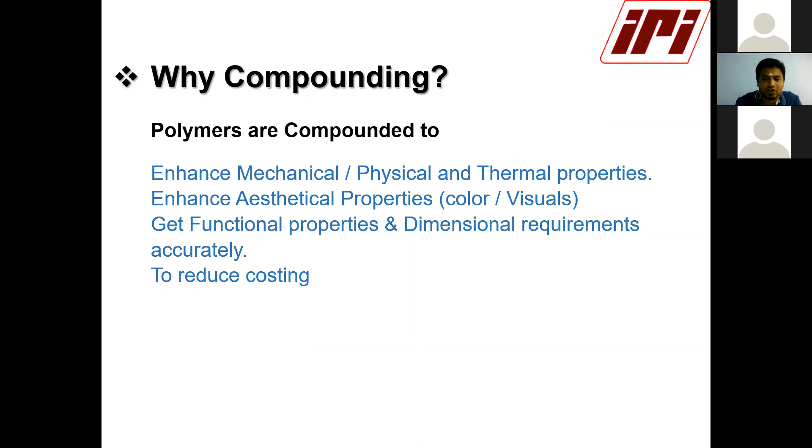Ingredients play a very crucial role to enhance compound properties: polymer alloys and blends, best example PC plus ABS blend alloys, and fillers to increase mechanical strength and stiffness, plasticizers for flexibility improvement, lubricating agents for easy moldability, antioxidants and heat stabilizers for blown film applications, and UV stabilizers and fire retardant additives for flammability and smoke suppression.

Best example is switch boxes and electrical items, conductive fibers for electrical properties, pigments for coloring and better aesthetics. For some parts to look good and shiny, we add pigments, and fillers for economic viability, wherever we can load more fillers to save more money.

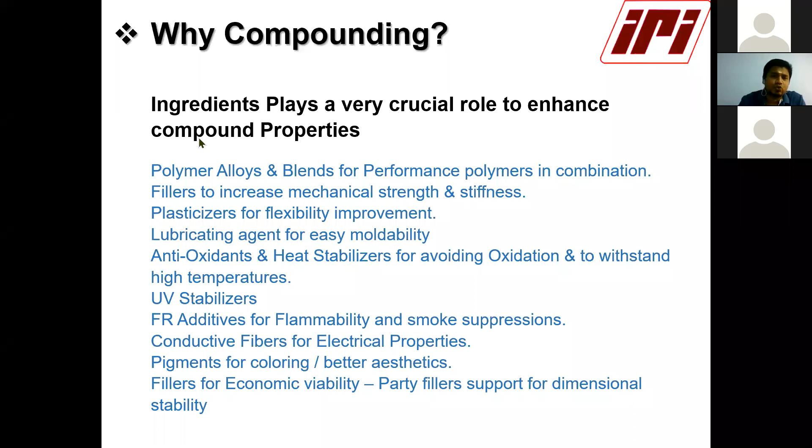And this is the extruder system: there is single screw extruder, twin screw extruder, multiple screw extruder. Today I am going to cover this twin screw extruder, co-rotating twin screw extruder, intermeshing type. This is the co-rotating twin screw extruder.

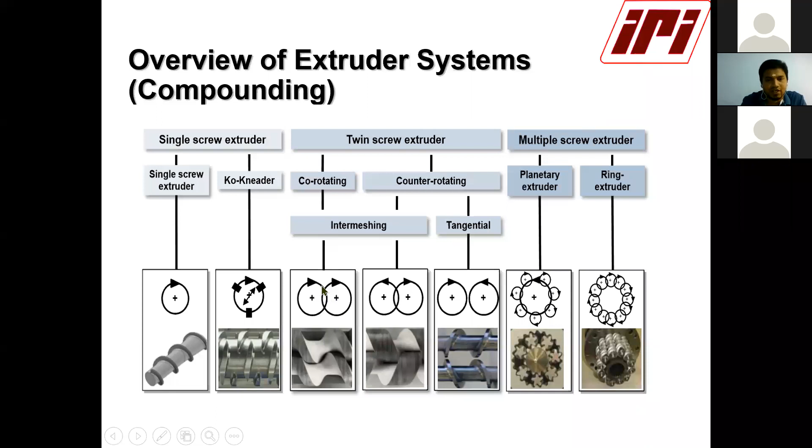Hello. Compounding task, madam.

Whenever we are entering into a compounding line, whether it is a factory, a customer end, maintenance, or a raw material segment, we should know and be ready to handle this compounding task, like alloying polymer alloys such as PC plus ABS or similar.

Then filtering of the polymer melt and degassing unit in the compounding machines, incorporating additives and colors, and major loading of fillers and reinforcement with glass fiber. Major engineering projects would come up with glass fill up to 40%, 50%. So these are the major compounding tasks.

Wherever line we go in compounding, we will face these tasks. And this is the general layout of the process.

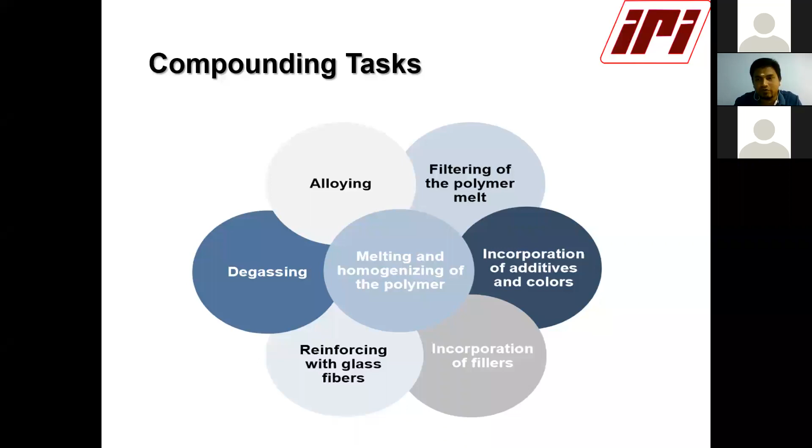This is the twin screw zone, the compounding zone. This is the main hopper, main feeder, where we are adding polymer, additives and fillers, and these are the screw elements.

This is a kneading element. This is the complete processing zone. Here the atmospheric degassing unit comes, and the vacuum degassing comes. Since we are adding ingredients like calcium carbonate powder and liquids, atmospheric degassing and vacuum degassing take place here.

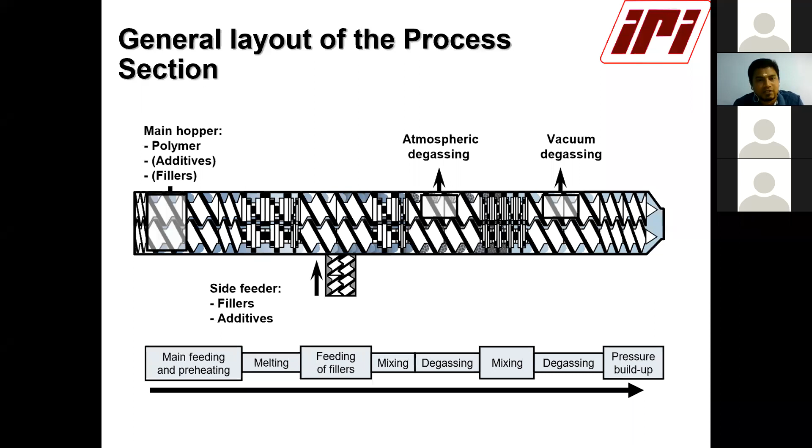And on the side, side feeder, filler additives will come based on the output. The side feeder is used, and then twin screw elements, segmented barrels, and diameter ratio.

The twin screw elements, this co-rotating twin screw, is made up of different kinds of screw elements. This is called screw elements, and this is kneading - these are kneading blocks. This is a conveying screw element, called conveying elements, and each of the screw elements and conveying elements is fitted on this shaft.

I will show in the next slide. And this is a segmented barrel - this is a segmented barrel type.

For twin screw compounding extruders, we should know what is this Do/Di ratio. This Do/Di ratio is the outer diameter of the screw, and this is the shaft inner diameter. So we need to know this.

If you consider machine zones, some companies like Coperion or Steer have a unique Do/Di ratio. For example, some companies work with a Do/Di ratio of 1.50, some work at 1.71, some work at 1.66. Based on this Do/Di ratio, the shaft safety will be higher.

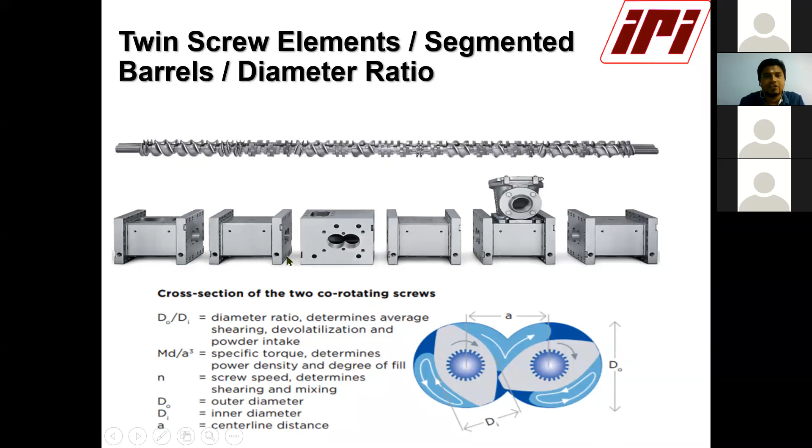And these are a few pictures of screw elements. This is an element, so-called conveying element, and this is a kneading element, which plays a major role in kneading and dispersion in the twin screw extruder. And this is also a conveying and kneading element on the left.

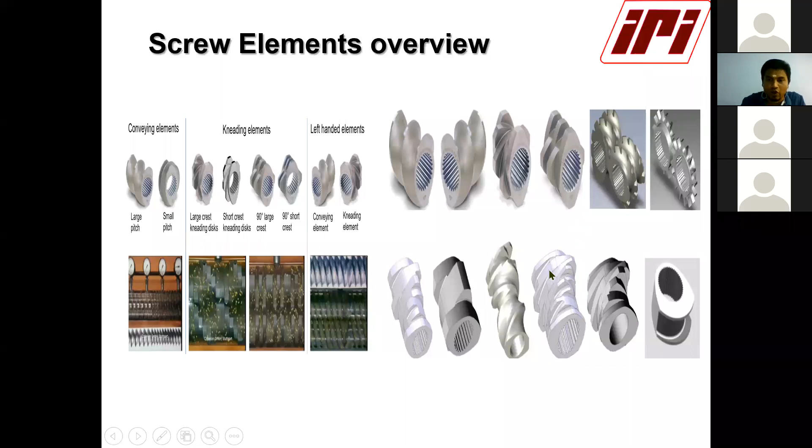These are some few pictures of screw elements and kneading elements. This is a kneading element in detail. These kneading elements ensure good dispersion and energy input, melting and good dispersion ratio of the end product, so that the MFI and melt quality will be good once we make the compound.

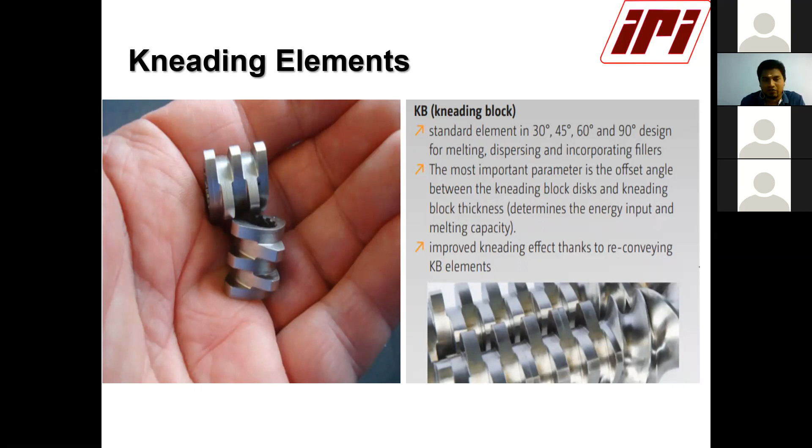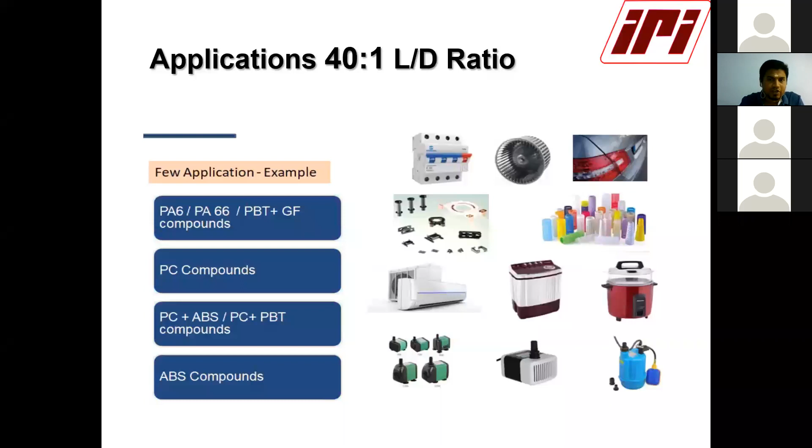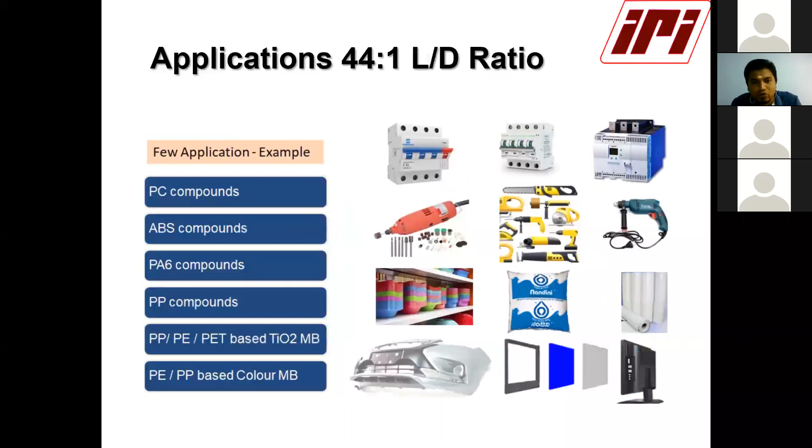And these are a few of the twin screw extruders. We consider the L/D ratio based on the application. There are many varieties of L/D ratio. For the below applications and products we are using a 40 L/D ratio, and for these applications and products we are using a 44 L/D ratio: ABS compounds, polycarbonate compounds, PP based color batches, and these are the product images.

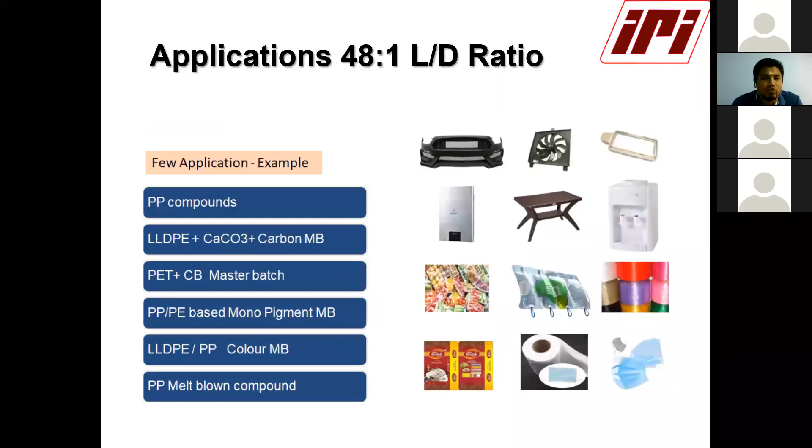Next is 48:1 L/D ratio. This we are using for mono concentrates and pigments, mainly for blown film application. For these end users we are using 48:1 L/D ratio, and for some products 52:1 L/D ratio: PP compounds, PP filler masterbatches, white masterbatches, PP, LLDPE, TiO2.

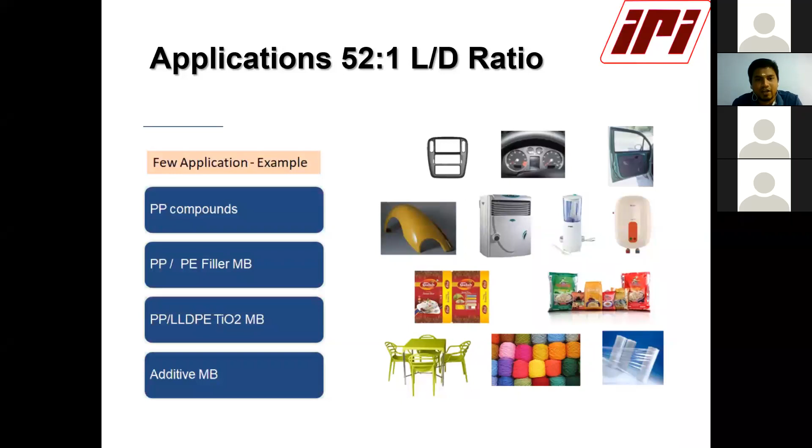Above that, we are going to use 58:1 also, which helps for high dispersion, like a high loading of 85% calcium carbonate with 15% PP. There we use a 58:1 L/D ratio. So this is the final, and this is the compounding operation, how it operates and what its downstream looks like.

And this one is extrusion and feeders. In feeders, gravimetric feeders and volumetric feeders are there. Based on that, we feed material into the main feed throat, and then the side feeder will take place. After that, the die face will be there.

Once the material melts and comes to the downstream, various kinds of downstreams are available: strand pelletizing system, water ring die face cutting system, underwater pelletizing system. So based on the application, based on the raw material, and based on the output, we are selecting these downstreams.

Basically for nylon and glass filled material, we use the strand system. For high filler loading up to 80%, 83%, 85% filler, we are using the water ring die face cutter. For white masterbatches, we are using die face cutter. For biodegradable compounding, we are using a die face cutter. And for heavy duty nylon material with very high output, we are using an underwater pelletizing system.

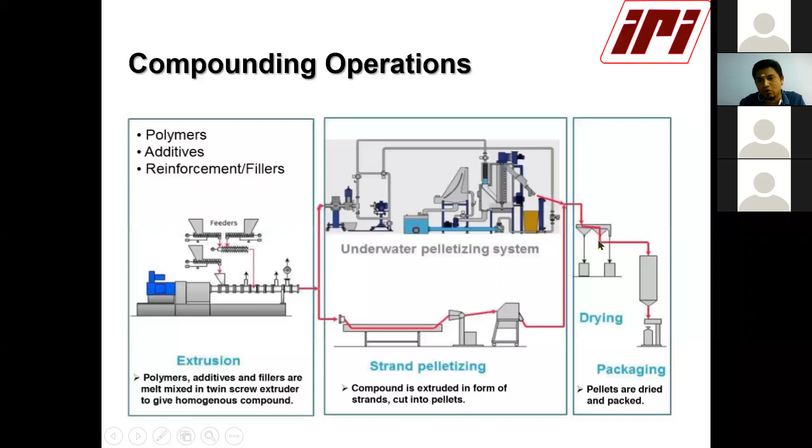Once the pellets come here, it will cut them and dry them, and then we do the packing. This is the general layout of the compounding industry. Whenever you enter big companies like Polygon, there you can find this complete setup. So this is the final slide of compounding machines.

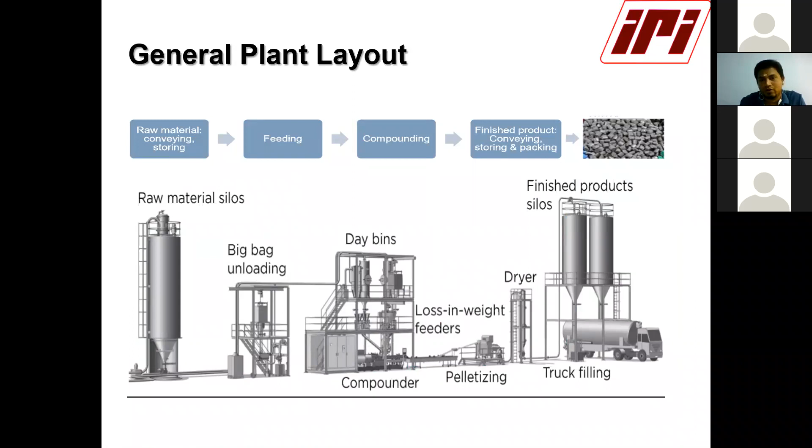Next, I'm going to injection molding machinery and an overview of IMM technology. Tentatively, 300 million tons of plastic raw materials are processed every year. Of that, 60% of processors are using injection molding technology, whether vertical injection molding, metal injection molding, co-injection molding, or injection compounding. Including everything, 60% are using injection molding technology.

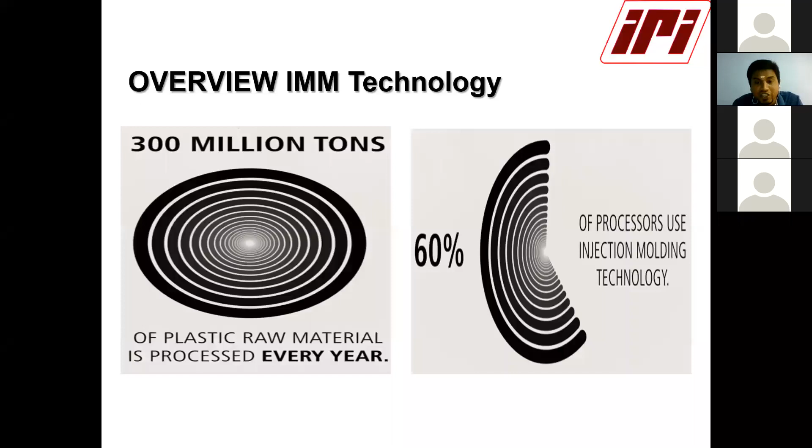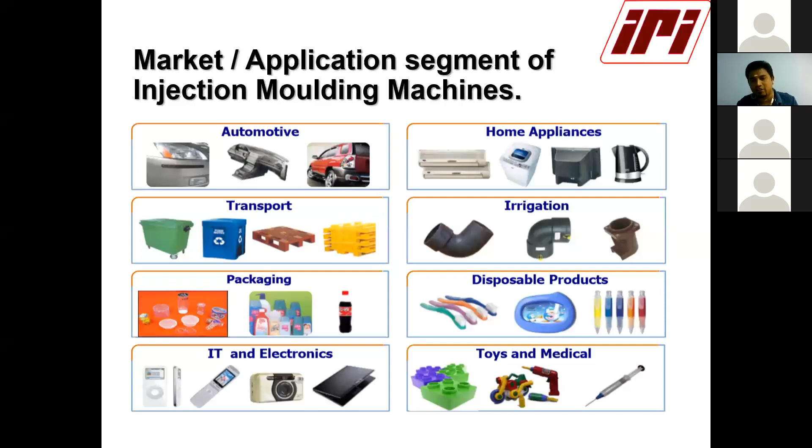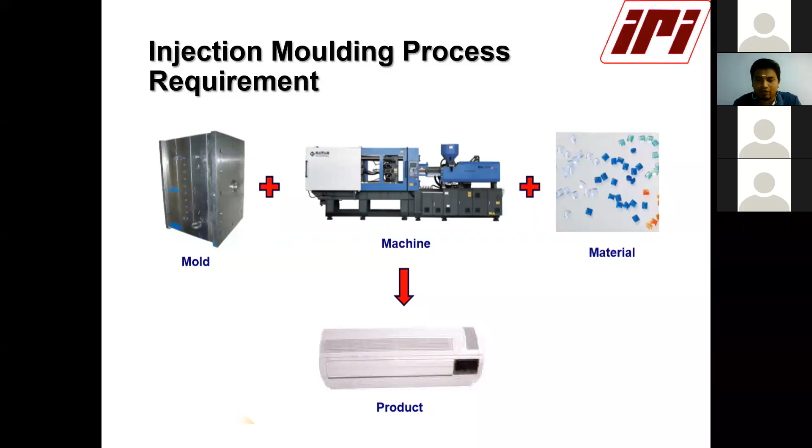And this is the injection molding process requirement: mainly mold, machine, material, and finally we get the product. This is a small animation video of how injection molding works. It's a horizontal injection molding machine. The process is clamping, then material melting through screw injection, then the product requires cooling, and finally ejection happens.

This is called a clamping unit, this is called an injection unit, and this is called a pump unit. I mean, what is the power requirement, whether it is a servo or a VDP, what is the heating capacity for the barrel based on the L by D ratio, how many zones of heaters are required. So this pump unit we will calculate. Now we will go to the next slide.

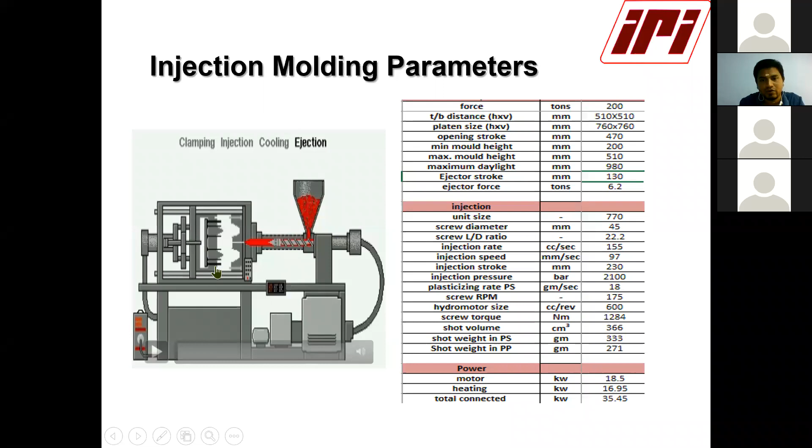For injection pressure, some materials have good MFI, while some materials like ABS require more injection pressure. So based on that, we have different kinds of screws in the same machine: A screw, B screw, C screw, D screw. Based on the injection pressure and injection rate of the product, we are selecting a machine.

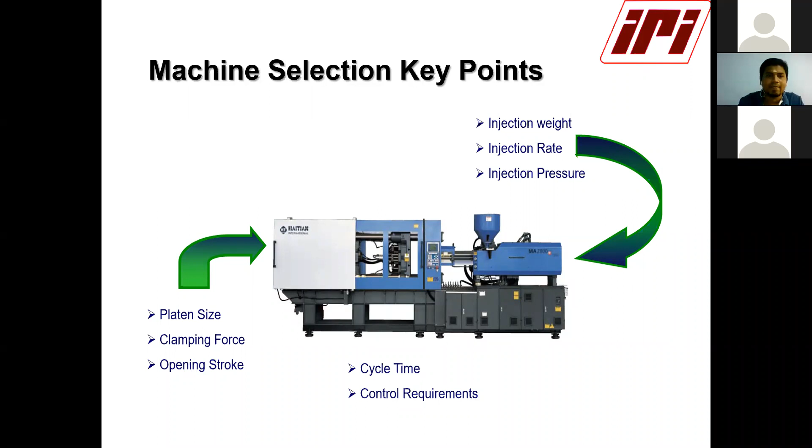And control requirements, a PLC will be there. Through that PLC we are mentioning what system pressure and what injection pressure rate we need. We are setting that in the control. And this is the basic clamping force requirement. This is the basic formula for clamping force.

If we are going to develop a new product, we need a mold initially. For that, calculate the clamping force required for that component by multiplying total injection pressure by the total projected area of the product, because the injection pressure has to reach wherever the projected area is. For that, we need injection pressure, injection speed, injection rate. So this clamping force calculation is very important before selecting an injection molding machine.

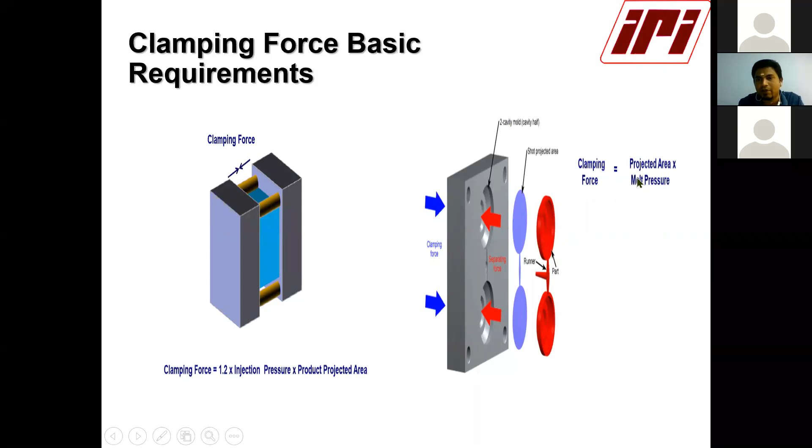And this is one example. This is the shot projected area, and this is a two cavity mold, where clamping force equals projected area into melt pressure. This is a clamping unit, and this is a mold. This is a mold dimension, and based on minimum mold height, maximum mold height, opening stroke, and maximum daylight, we have to select the machine.

It depends upon the machine. In some cases, the mold dimension will be 500 by 500. A 200 ton machine can easily accommodate it because the tie bar distance is 510 by 510. But if we want to load it in a 100 ton, it is not possible because that is 420 by 420 tie bar distance. So these points we have to keep in mind before selecting a machine.

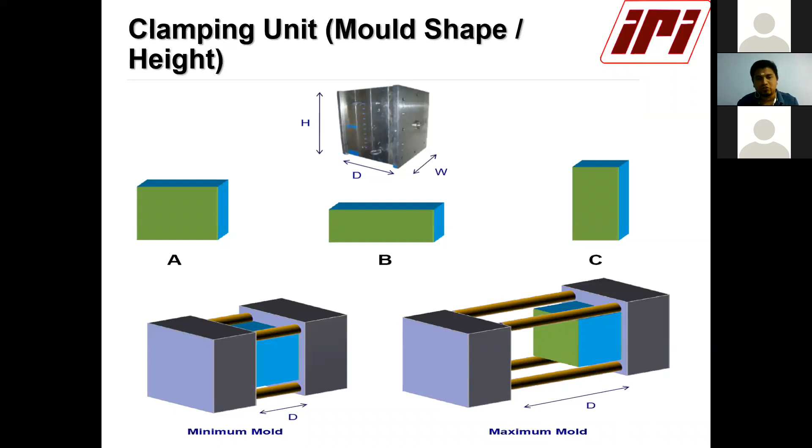Meanwhile, in the clamping unit, consider the product we are going to run. While the mold is opening, that product should drop automatically, otherwise we have to take it out. If that is not possible, the mold opening stroke plays a major role. So daylight and opening stroke play a major role in the clamping unit.

And then mold weight also plays a major role in an injection molding machine. If you consider a 350-ton machine, we can accommodate three ton weight. If you go to 4 ton or 4.5 ton, then machine safety is not there. Tie bar breakage or tie bar bending may result. So we have to consider mold weight and mold opening stroke before selecting a machine.

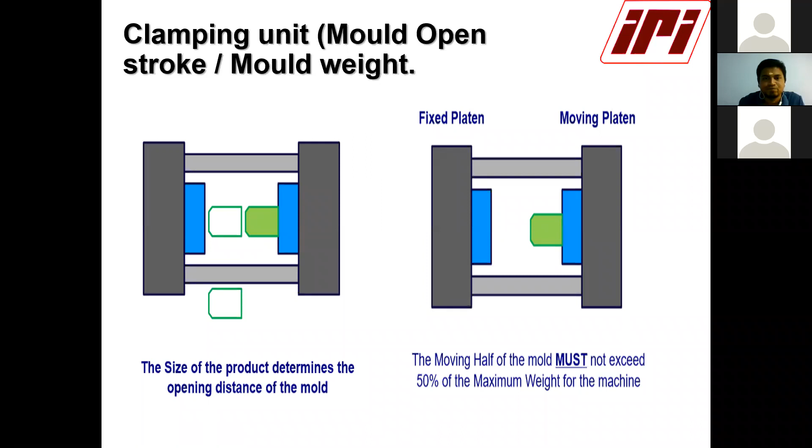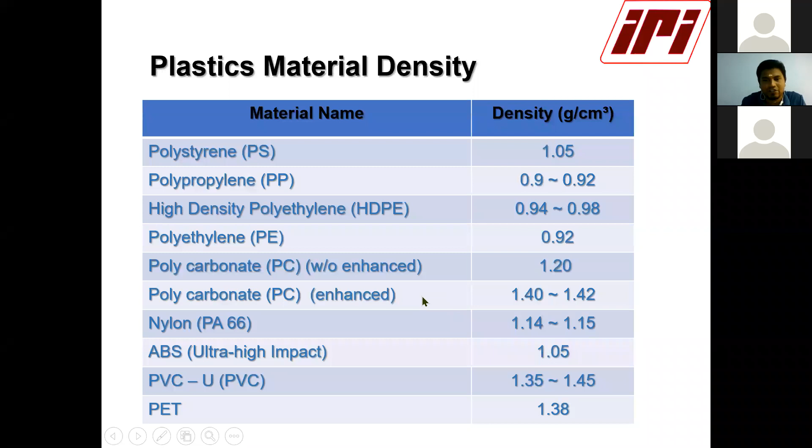And these are the plastic material densities, the common plastic raw materials we use in our plastic injection molding machines. And injection weight, injection rate, and cycle time also. For shot weight, the formula is product weight into cavities plus runner, divided by material density. So we will get the shot weight. And injection rate, injection speed, is shot weight divided by injection filling time. And then cycle time parameters influence.

If the wall thickness is very low, for example 500 ml or 250 ml thin wall containers, where the wall thickness is below 0.5 mm, there is no requirement for cooling. So we will get a cycle time of a few seconds to 5 seconds. But if the wall thickness increases, like furniture or crates, the cooling time takes more, so the cycle time will be more.

Meanwhile, plasticizing rate plays a major role in cycle time. How fast the melt is plasticizing, gram per cc, is also very important, which results in good cycle time benefits.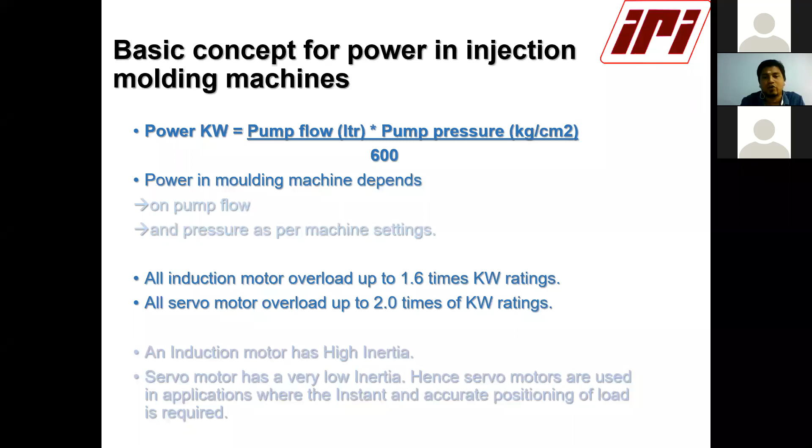And now we are going for blown film extrusion. In blown film extrusion, there is monolayer and there is multi-layer. Monolayer is a single extruder forming through a single die to produce a single layer film. Best example for monolayer: our carry bags, grocery bags, garbage bags. They are making from 3, 4, 5 microns to 20 microns for carry bags. Some special applications are also there in monolayer.

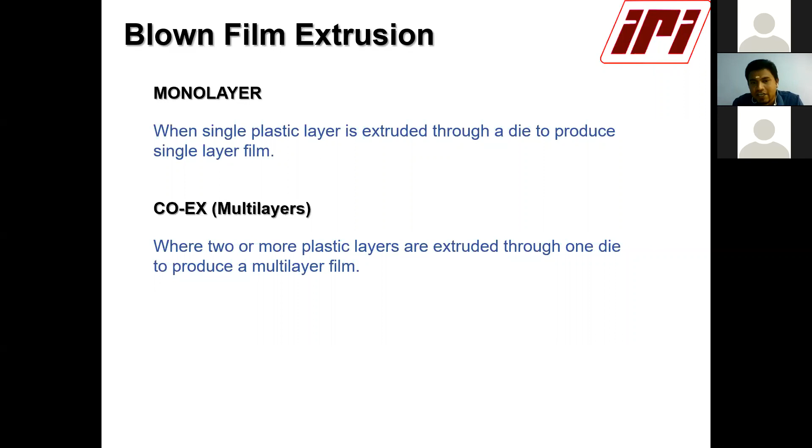And then multi-layer means two or more plastic layers, more extruders through one die to produce a multi-layer film. Why we are going for coex multi-layer? Wherever barrier properties are required, I mean shelf life, products which require more shelf life, like milk, water, oil, some juices, some chips, we have to go for multi-layer blown film. What is the benefit of that?

Generally if you consider a normal Hatsun or Arokya milk, that is a 3-layer film. If you consider CavinKare milk, that is a 7-layer film. If we make the same in monolayer, we have to go for minimum 100 or 150 microns thickness. And there will not be any sealability and weldability. So we are going for 3-layer. Hence 3-layer and 5-layer give more barrier properties to the product which requires high shelf life. It depends upon the product.

We have various types of recipes. There is metallocene, there is LLDPE, there is HDPE, there are other additives. So many recipes are available. Based on the product and market, we are packing by using those recipes.

And when we compare 3-layer to 5-layer, the best advantage I would say is, if you are making some shrink films, like Coke bottles or water bottles covered by shrink films, normally with 3-layer it is coming 80 to 140 microns. If you go for 5-layer, we can reduce a further 20% of microns, and we can save raw material also. So multi-layers help us to save more material. These are the main reasons for going for blown film multi-layers.

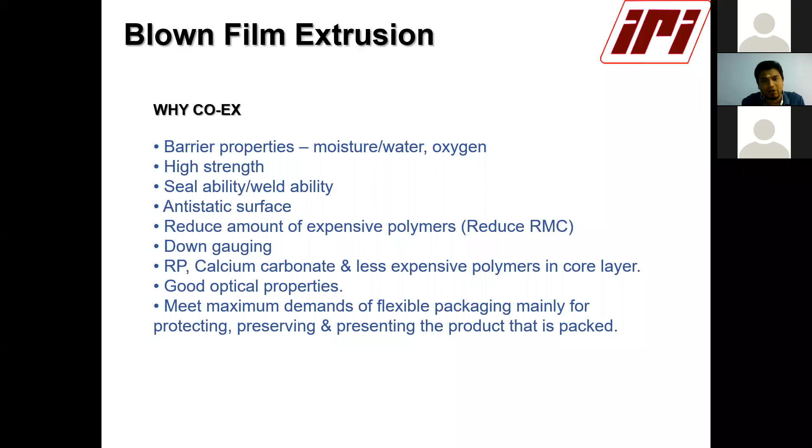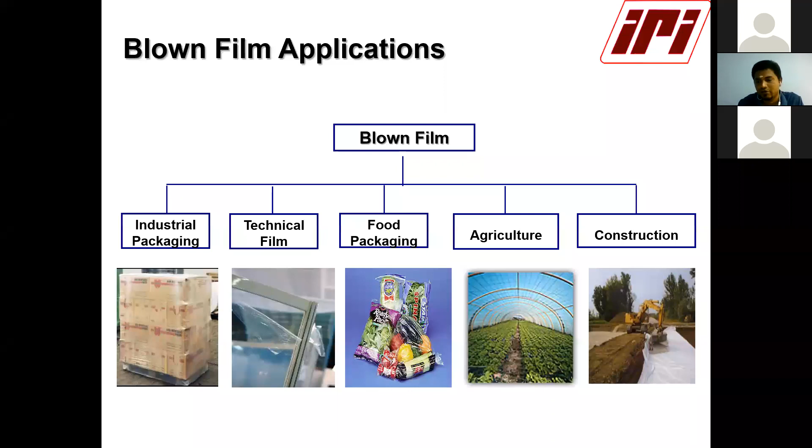And these are the major applications for blown film: industrial packaging segment, technical films, food packaging like lamination films, agriculture mulch films and shade net films, greenhouse films, and in construction also, tarpaulin. And important terms of blown film to be considered.

These are basically the important terms of blown film. Before this is the lip gap of the die, the die diameter. What is the die diameter, what is the die size, what is the neck height of the bubble, what is the frost line height, and mainly important is BUR, blow up ratio, and DDR, drawdown ratio, whether we require a bubble or we require a tube.

And this is the machine direction, this is the transverse direction, and this one is the lay flat width. Normally, once the film gets rolled, we call this the lay flat width. Whenever you enter any blown film industry, they will use this: what is the width of the film. The machine design is also based on the width of the film; we will select the machine by lay flat width and thickness of the film, what microns, what gauges they need, and MPM.

MPM is meters per minute. That is called line speed, where the take up nip roller, how fast they are pulling the film from the die. That is called MPM. If thickness increases, the MPM will be low. If thickness is low, the MPM will be increased.

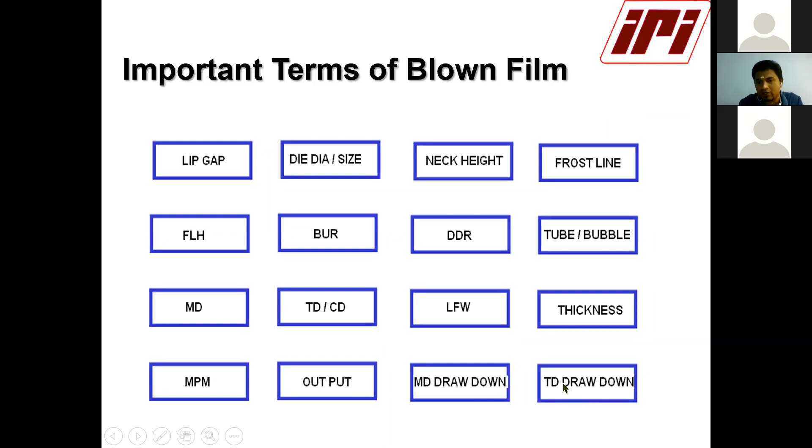And then output, mostly for extruders. In injection molding machines, we use the term cycle time of your machine. Same thing in blown film or extrusion or co-rotating, we use the output of your machine per hour: 100 kgs per hour, 200 kgs per hour, 500 kgs per hour. Based on that output, we will select a machine. And machine direction drawdown and transverse direction drawdown. And these are some conversion charts.

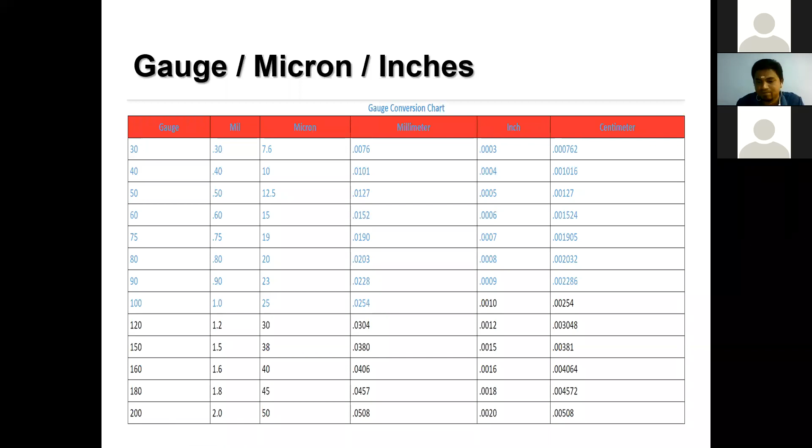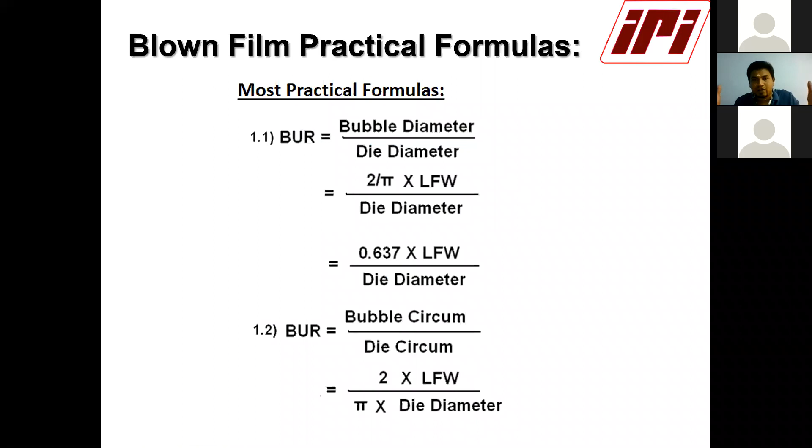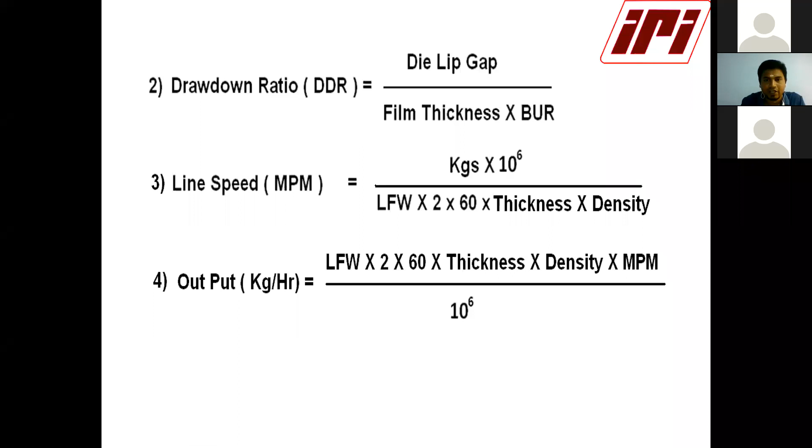The output is also based on this formula. Based on line speed, density and thickness, we are calculating the output. So these are the basic formulas we need before entering the blown film industry. And this is just a simple drawing of the bubble. This is called the blown film bubble, and this is the die. This is the lip gap, and this is called the neck height of the bubble.

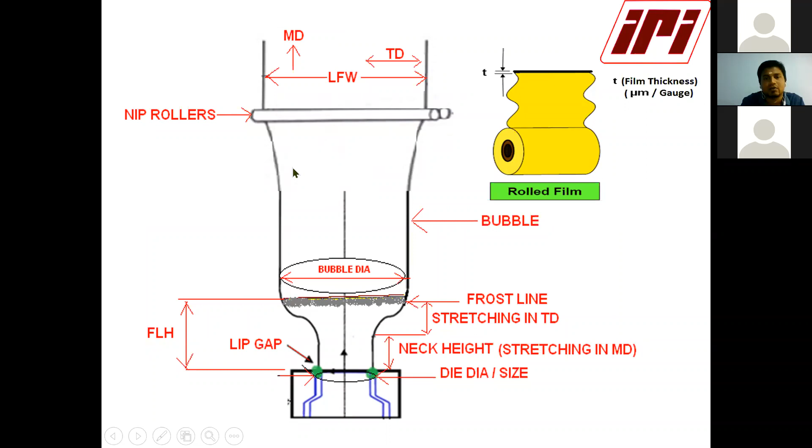This is the frost line. This is the frost line overall height, this is the overall bubble diameter, and this is the bubble. This one is the nip roller, which pulls the bubble from the die and helps us flatten the bubble. This is called lay flat width. It is going towards the machine direction, and this is the rolled film. This is called thickness, where we mention micron or gauge.

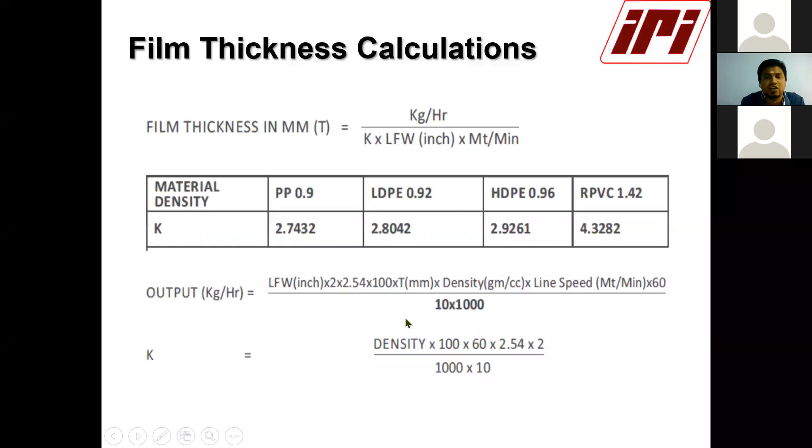And this is the film thickness calculation: output in kg per hour divided by K value into lay flat width in inches. Normally it will come in mm, so we have to convert that into inches, into meters per minute, that is line speed, MPM. And this is output kgs per hour: lay flat width in inches into 2 into 2.54. So these are the basic formulas to calculate output and film thickness.

And multi-layer, general terms about the machine. This is multi-layer. This is 3-layer: 3 extruders will come, 1 die will be there. 5 extruders with 1 die is 5 layers, and with 7 extruders it's 7-layer. We have 9 layers and 11 layers also in the market, but very, very few. So far in India, we have started to use 7 layers also.

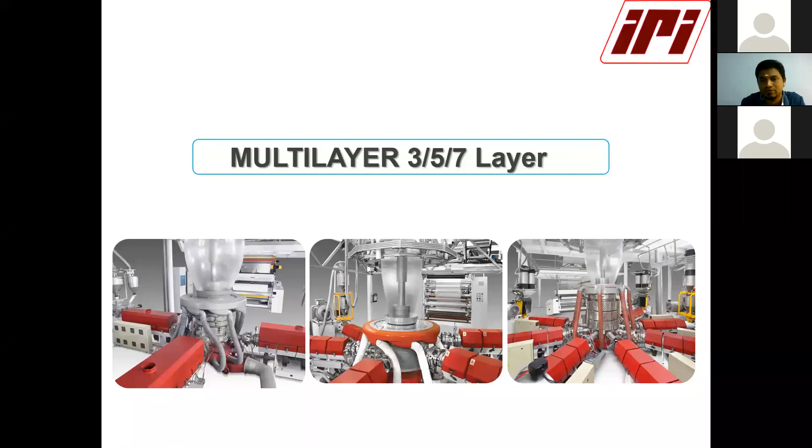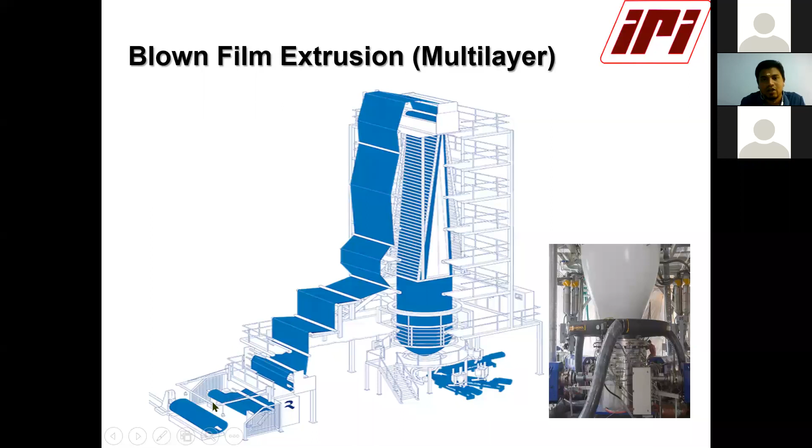And in blown film extrusion, normally there are two types, OBC and IBC. Outer bubble cooling and inner bubble cooling. Whenever the output increases and we need a bigger film size, OBC cooling is not sufficient, which results in poor properties of the film. So we need this, called an IBC system. This is internal bubble cooling.

This air will cool from outside, and this will cool the bubble inside, so cooling will happen very fast, so that we will get good output and good properties also. Wherever the output requirement is huge, we are using this IBC, internal bubble cooling, and this is a bubble guide basket. Here the internal bubble cooling will work.

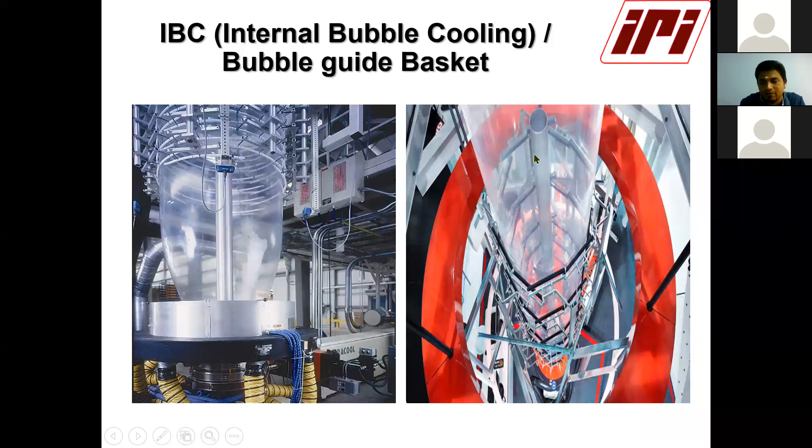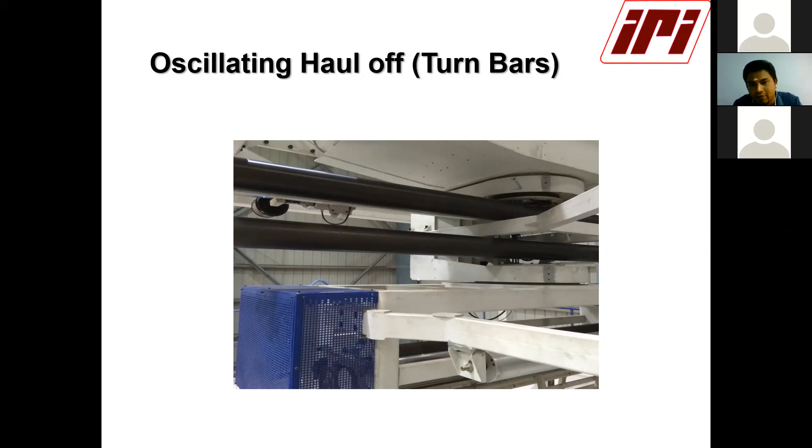And this is an oscillating haul off. Above the take-up nip, the oscillating haul off will be there. Its role is to make uniform thickness. For gauge randomization, everyone is using that. And this is a winder. Once everything has been completed, this winder will roll the films and it will unload. And this is the end of my blown film.

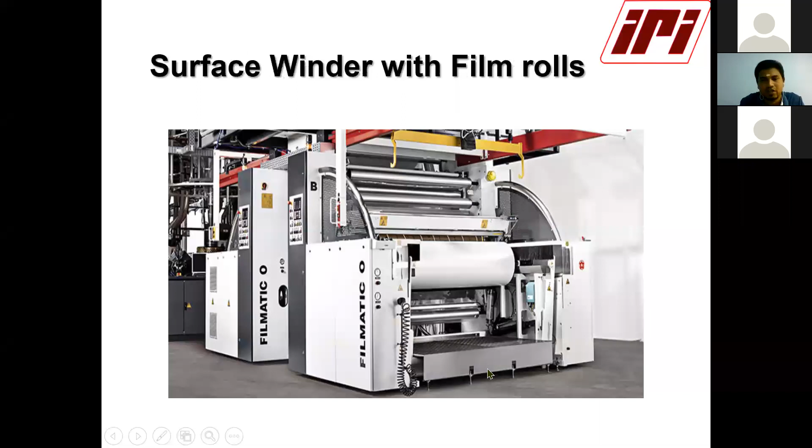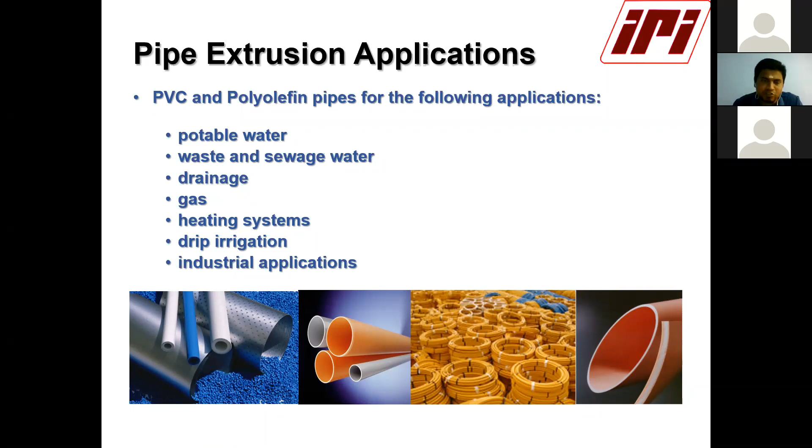And the next slide is pipe extrusion. Mainly for pipe extrusion applications: PVC, CPVC, UPVC, polyolefin pipes, for potable water, waste and sewage water, drainage, gas, heating systems, drip irrigation, industrial applications, solid pipes, PPR pipes for industrial. In so many applications, PVC, CPVC, PPR, and polyolefin pipes play a major role. And this is a general layout of an extrusion line.

This is a twin screw extruder, and this is called a vacuum tank. And here this is the die head, and the die will give us the ID of the pipe. In the vacuum tank there will be vacuum calibration. It will give us the outer diameter of the pipe. The vacuum helps to make the perfect size of the pipe, and cooling, because based on the output, pipes need some cooling.

After this, this is a cooling tank. Then some companies may print their names or ISI, so this is a stamping unit. And then this is a haul off, similar to blown film. This haul off will pull the pipes based on the line. Here it's also mentioned the line speed, meters per minute. And this is a cutting unit, based on 3 meter or 6 meter, whatever we require. There is an encoder synchronized with the haul off, so it will give a signal and it will cut based on that.

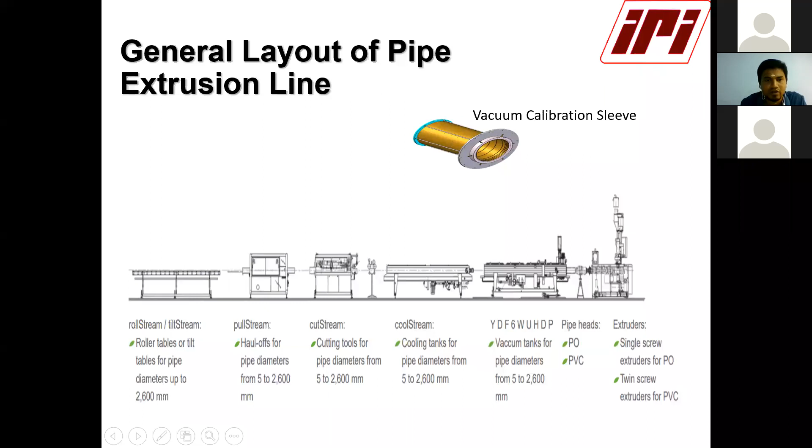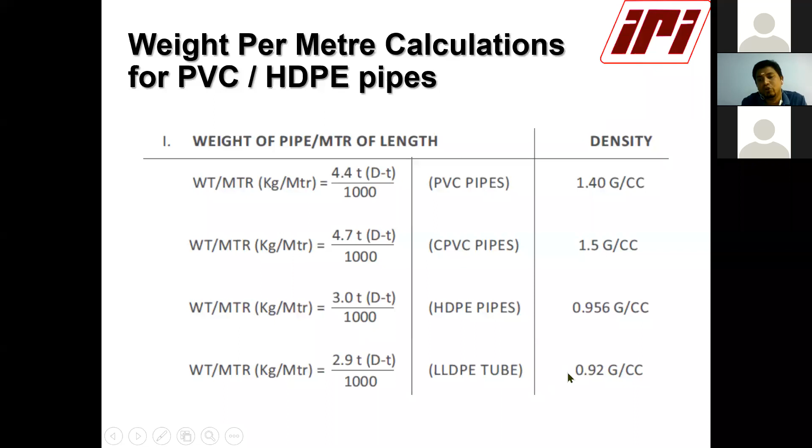And this is a tipping unit. Once the 6 meter pipe comes, it will take and drop that pipe onto the floor. And finally, these are the basic calculations for pipes. Before configuring pipe extrusion lines, we need these basic formulas: weight per meter. For PVC pipes, this is the formula and this is the density. For CPVC pipes, this is the formula and this is the density. For HDPE pipes, this is the formula and this is the density. For LLDPE tubing, this is the formula and this is the density.

And pipe cooling length based on output. Normally the cooling tanks and vacuum tanks come in 9 meters. So what is the cooling length we require? We have to calculate this with the cooling length formula. Whenever we are entering the pipe industry, we should know what cooling length is and how we have to calculate it, for example the cooling length of a PVC pipe.

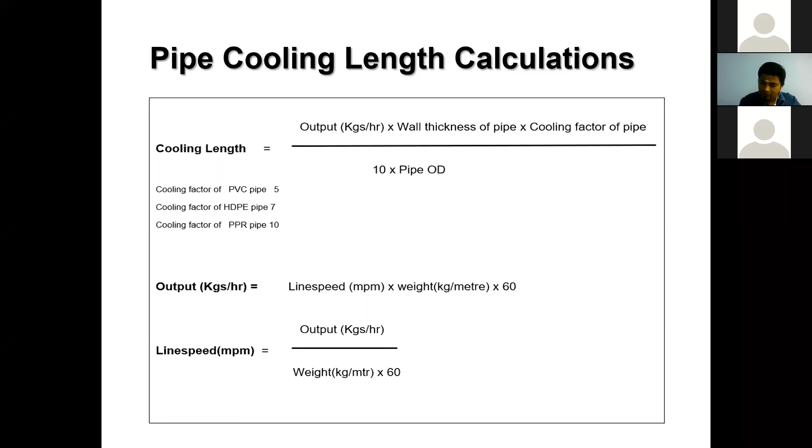Total output, if you consider 350 kgs per hour, into wall thickness of the pipe, multiplied by the cooling factor of the pipe. For PVC pipe, the cooling factor is 5. The cooling factor for HDPE pipes is 7. The cooling factor for PPR pipe is 10. So we apply this formula and we get the complete cooling length. For example, if the total cooling length is 24, first 9 meters is the vacuum tank, the rest 15 meters is the cooling tank.

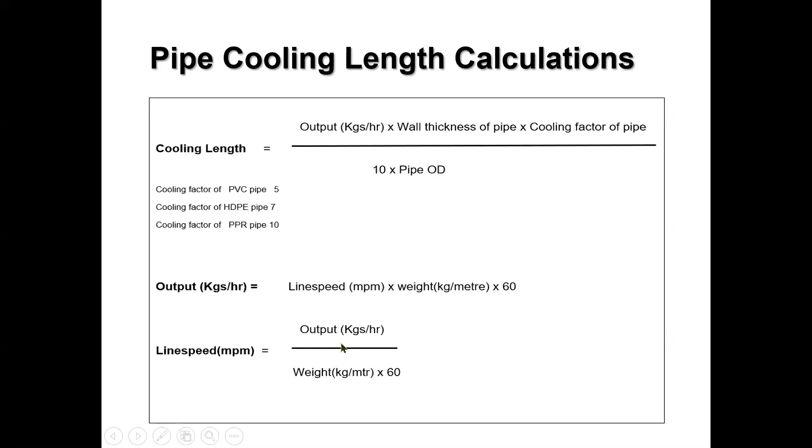This is the output in kgs per hour: line speed into weight in kg per meter into 60 for 1 hour. And for finding the line speed: output divided by weight in kg per meter into 60.

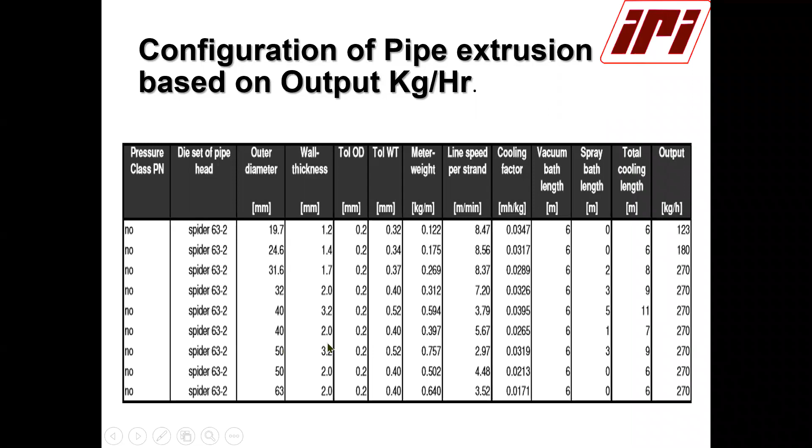For 50 mm, if wall thickness increases, the cooling length also increases. So here it is. Overall the wall thickness is 3.2, where the cooling length is more. So we go with one vacuum bath and one normal cooling bath.

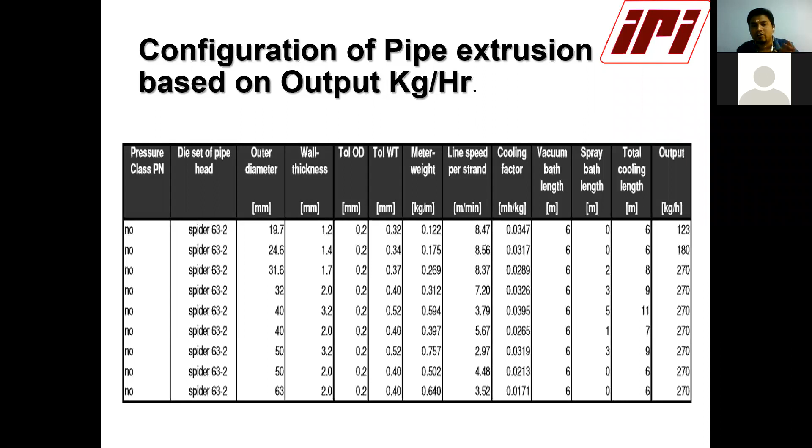So this cooling length and output line speed calculation and this worksheet is mandatory for configuring any pipe extrusion unit, for HDPE as well as PVC.

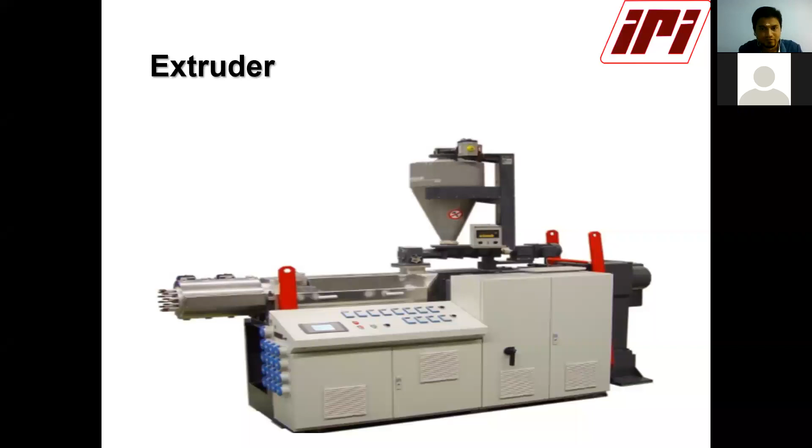Based on the end application, we use the cutter. For HDPE, it requires a smooth cutting edge because the post process is butt fusion, so we need to cut in a square shape using a swarfless cutter. The cutter construction is completely different. But for PVC, if you consider normal conduit pipes, there's no special requirement, so we can easily cut it with upstroke cutting.

In some cases, if we are going for post process SWR fittings, there socketing and chamfering is required, so we have to go for special application cutting like chamfering. So case to case, application to application - agri pipes, SWR pipes, plumbing pipes - we have to select the cutting unit.

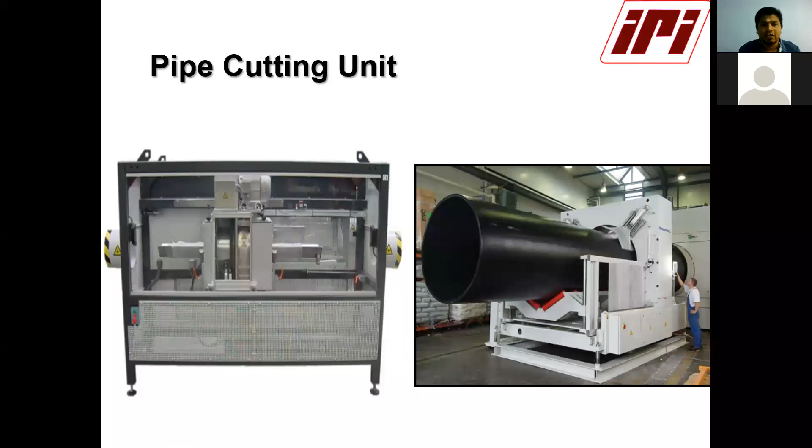So these are the major parts of PVC pipes and HDPE pipes extrusion. And this is the end of my technical seminar about plastic processing machinery.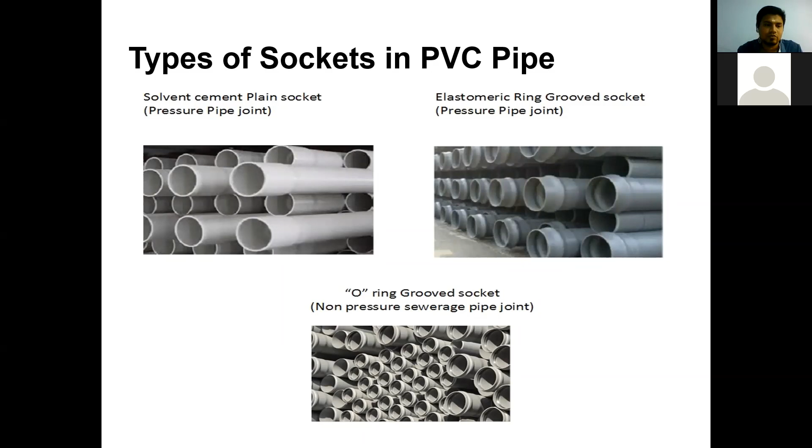Now I want to brief about my own company, where I'm working. I'm working in a company called Haitian India. We have a factory in Gujarat, in Mascot Industrial Park, and for factory unit 2, we already have land in Sri City, Andhra Pradesh for South India. It's yet to be constructed.

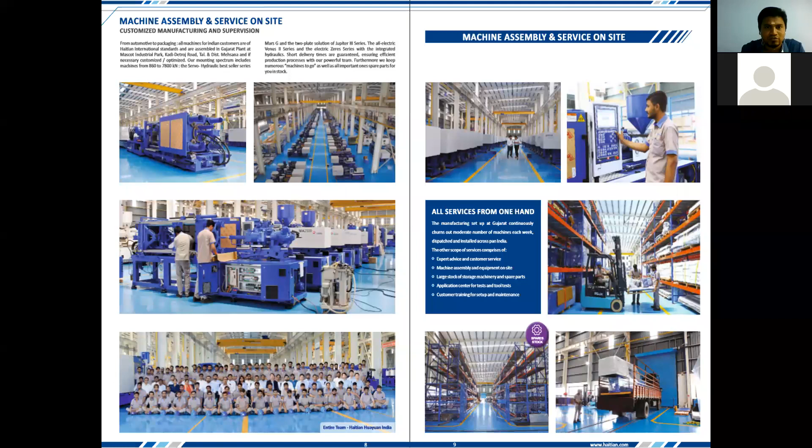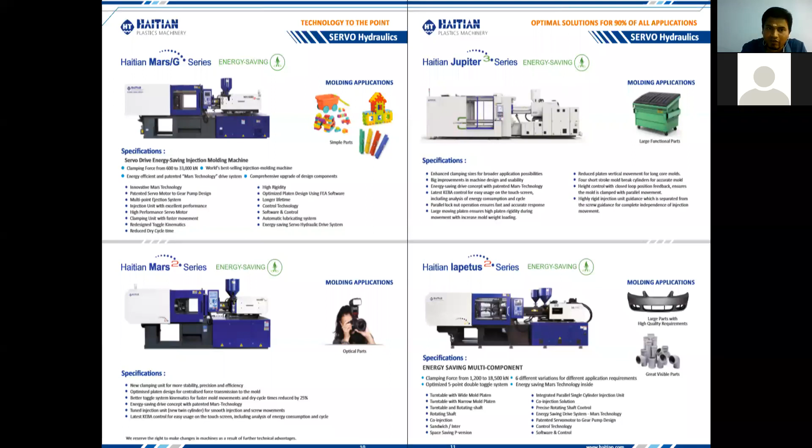These are our Ahmedabad factory pictures with the assembly unit, employees, and our spares and stores. These are our machine models. We offer servo machines, two platen and servo machines, two color injection molding machines, co-injection molding machines, and this is the Zhafir Venus - we offer all electric machines, hybrid machines, and two platen hybrid machines also.

I'll show one video about our machineries - this is the toggle machine.